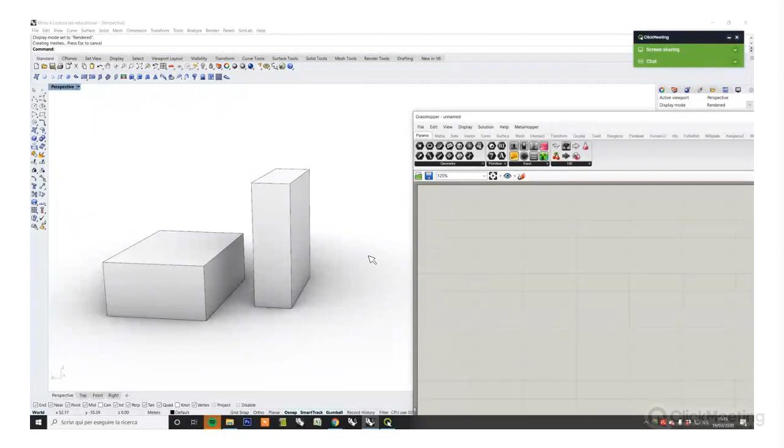So an algorithm is a way for getting a particular task done or solving a particular problem by splitting a complex problem into a set of simple operations and tasks. Before I was talking about a recipe. If you think about baking a cake, for example, we need to use a set of things. We need ingredients, first of all. We also need tools for preparing a cake, an oven, for example, but we need a procedure in order to prepare a tasty chocolate cake. Now, when you are dealing with algorithms, you basically do the same thing.

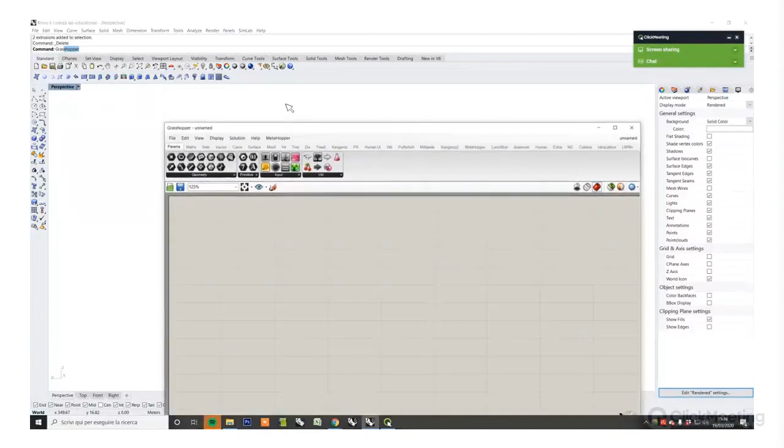And the first thing to understand about Grasshopper is the interface itself, which is a super simple environment. As you can see here, we have this window that works in parallel with Rhino. You can run Grasshopper just by typing the word Grasshopper on the command line of Rhino 6, or alternatively, you can click the relative icon here, Launch Grasshopper. When you launch Grasshopper, you will see this simple window, which is divided into two main parts: this area, called the components area, and this one, called the canvas.

The components area can be imagined like a shelf with ingredients, once again. If you want to prepare a chocolate cake, you need chocolate, milk, sugar, and so on. Our ingredients are stored within those tabs, usually called categories. For example, we have params, mathematical ingredients, vector ingredients, curve, surfaces, and so on. They are not actually buttons. Cosmetically they are similar to the ones in Rhino, but if I click here or there, nothing happens. They don't execute any command.

But basically, you can drag and drop those objects onto the canvas, which is a kind of kitchen table where we are going to prepare our chocolate cakes, our recipes. They are funny and fancy objects. As you can see, you can drag and drop them there. They are different from each other, objects with fancy icons. They look like batteries or boxes. Now we are going to understand what they are and how they actually work.

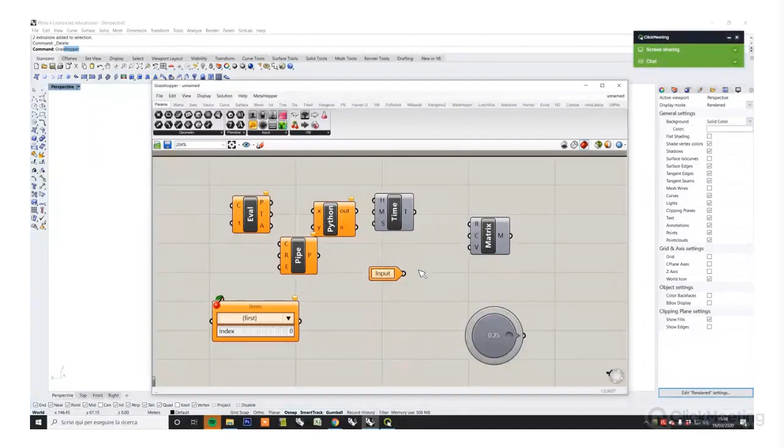The canvas, the central area I showed you before, is not an interactive one. It's not a three-dimensional space. This is just a white table where we are going to create our algorithms. An algorithm, once again, is a procedure and is made using the so-called components. In my analogy, they are the ingredients to create our recipes. Now, let's take a look at the components and how to combine them to create proper, working algorithms.

Let's go, for example, to the vector tab here. As you can see, every tab has a set of subcategories. In vector, you can see field, grid, plane, point, and so on. Let's go to point, click on this one called construct point, and put this object here. I'm also going to use a tip so you can see the name here. This component is called construct point. This is one of the many components you can find in Grasshopper, and every component in Grasshopper does something, generates something.

For example, this specific component, if you hover the mouse here, you can see a tooltip which says this component constructs a point from X, Y, and Z coordinates. In other words, in Rhino, in a three-dimensional software, you can create a point by selecting the proper command and by clicking on the three-dimensional space. Or, for example, we can use this guy here in Grasshopper.

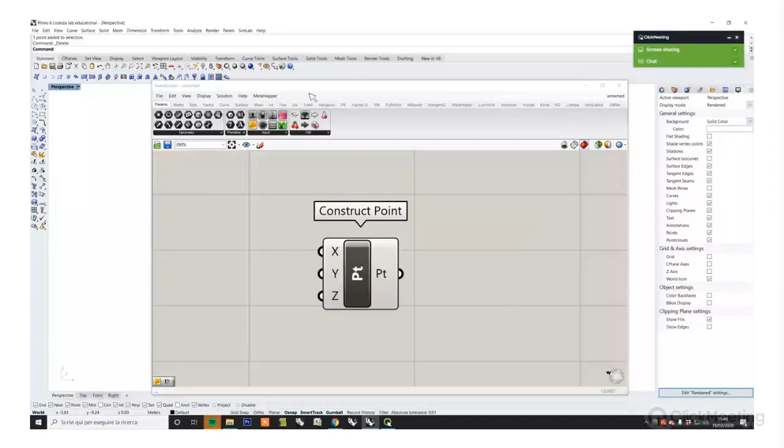In other words, it's important to say that inside Grasshopper, we are going to create the algorithm, which gives us as an output a geometry inside Rhino. So as you can see here, where I can also activate the grid in Rhino, when I put this component within the canvas, you can see this point appearing inside the three-dimensional space, and in particular at the axis origin. So it basically means that this point has 0, 0, 0 coordinates.

So once again, if I delete this component and I put it again, so I come back to vector, construct point here, as you can see, we can see a point appearing in the axis origin. Now, we need to understand how components work, then we need to understand the anatomy of a component in order to master their functioning. So basically, we have three typologies of components. Let me write something here so it will be easier to understand.

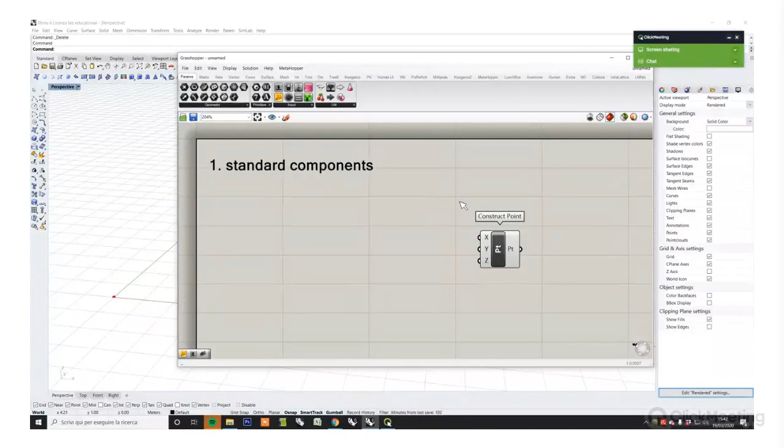So we have the standard components. This is the first typology. And construct point, for example, belongs to this category. Now, a standard component is an object which is fed by data, so we can put data inside this component. It does something and it generates an output. So you can basically imagine a standard component like a kind of blender.

So we have a blender. It means that you can put ingredients inside the blender. The blender does something, so basically it merges the ingredients, and so we get something which is our output. So we can prepare a milkshake, putting, I don't know, milk, ice cream inside a blender. So we blend the ingredients and we get some output. So the standard components, they work like this.

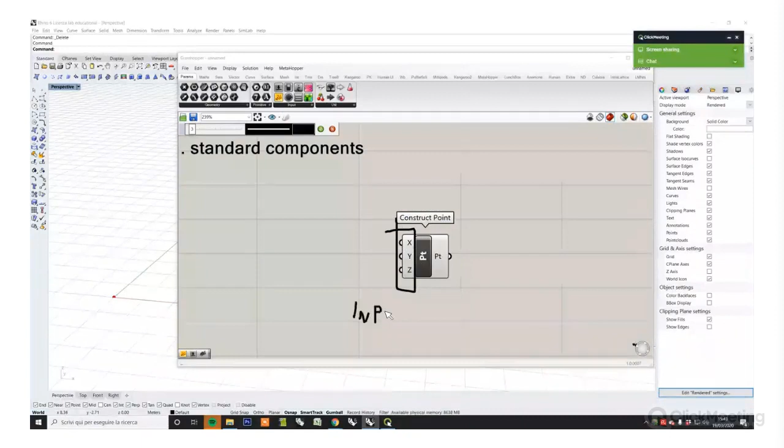So why is construct point like a blender? Because we can put ingredients inside X, Y, and Z. In this specific case, we can put values like 0, 0, and 0 by default. And so we get an output in Rhino, in particular, we see a point here. Of course, it's possible to change the input or also the output. So basically, we have this area, which is called input area, and then we have this area, which is called output area.

There are many ways for changing data, in other words, to change the ingredients within our blender. One of them, in case they are numeric values, is just using a second typology of components. They are called input components. So once again, the first ones are our blenders. The second category, input components, can be imagined as a remote control. In other words, it's a kind of component which doesn't blend data, but just gives data as an output.

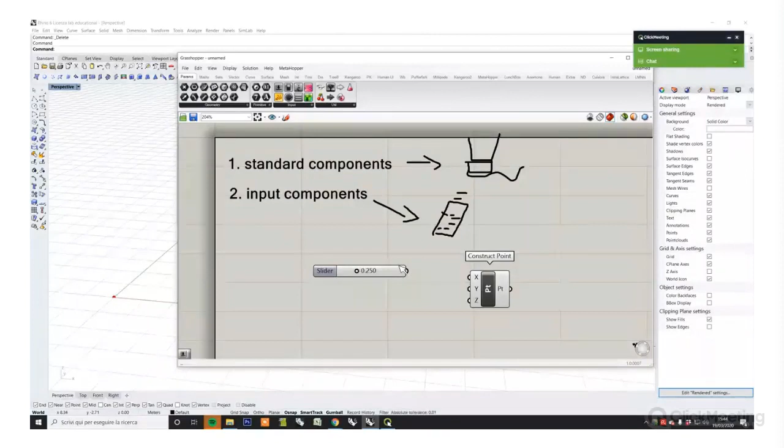One of the most important, you can find it inside the params category and input category, is the number slider. So the number slider, in our analogy, is like a remote control, and helps us in providing numeric values from this component to another input. So for example, I can transfer this value that you can see here. By default, you can see 0.25. I can transfer this value inside this input.

How? We can do it in a super simple way by extracting this object, which is called wire. So this wire can be connected, for example, here. So now we have a direct connection between 0.25 and the X input. So what is going to happen here in Rhino? As you can see, let me come back here.

If I change this numeric value, I can slide this central grip. That's why this component is called number slider, because you can slide this value. As you can see now, the value ranges between 0 and 1. And so also the point is moving from 0 to 1 meters, because right now in Rhino, as you can see here, we are having meters as the main unit. So Grasshopper is not something external from Rhino. We are working inside Rhino in a way.

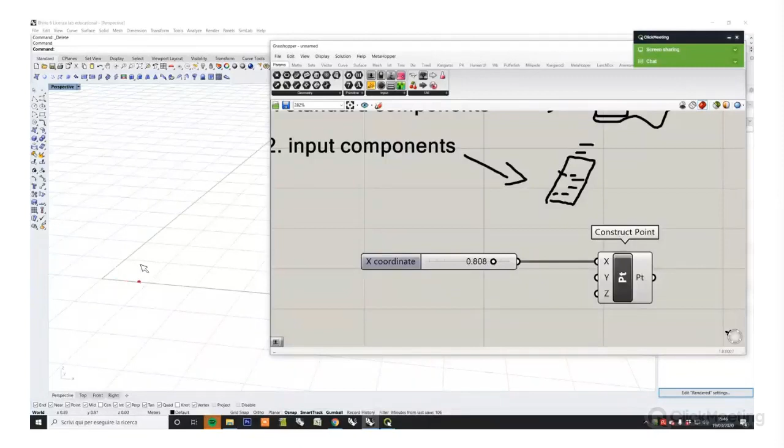And so 1 means 1 drawing unit in Rhino right now. So as you can see, we are getting this kind of parametric behavior. In other words, we are changing this parameter, and this point changes accordingly. We can do the same thing for y and z. We can do it by putting another number slider, and we can connect this one here, for example.

By default, as you are realizing, the slider ranges between 0 and 1. Of course, we can set this object, so we can change the numeric range by double-clicking here and by applying some change inside this window. But as I always say, life is too short to waste time in setting parameters like this, and actually the Grasshopper developers invented a new way, a kind of shortcut for putting numbers inside the canvas.

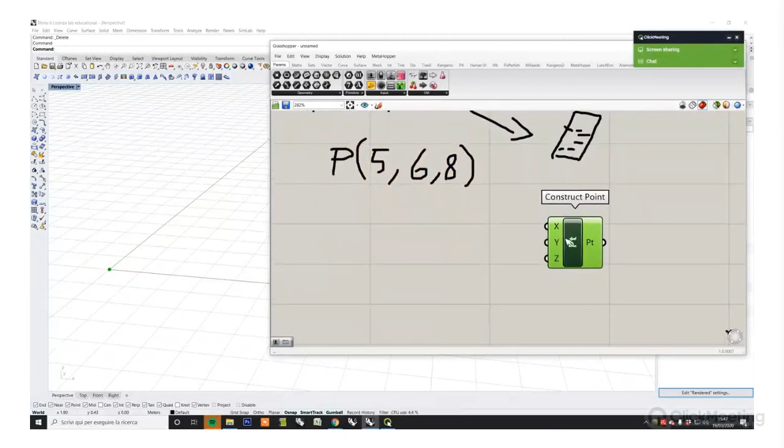So for example, if we want to define a point with coordinates, let's say 5, 6, and 8, okay, we can do something super simple. I can double click on the canvas. As you can see, a search bar appears like that, and I can just type 5, for example. So Grasshopper is suggesting the number slider, so I can click here. And as you can see, we have a slider which already has 5 as a current value, so I can connect this one here.

And as you can see, my point is moving 5 units according to the x-axis. Then I want 6 as a second coordinate, so double click here, 6, and okay. So we have 6 units according to the y-axis, and once again, double click here, 8, number slider, and here it is, we have 8 as a z coordinate. So we have a point defined in space, as you can see here. Of course, we can still manipulate the position by moving the number slider in x, y, and z direction.

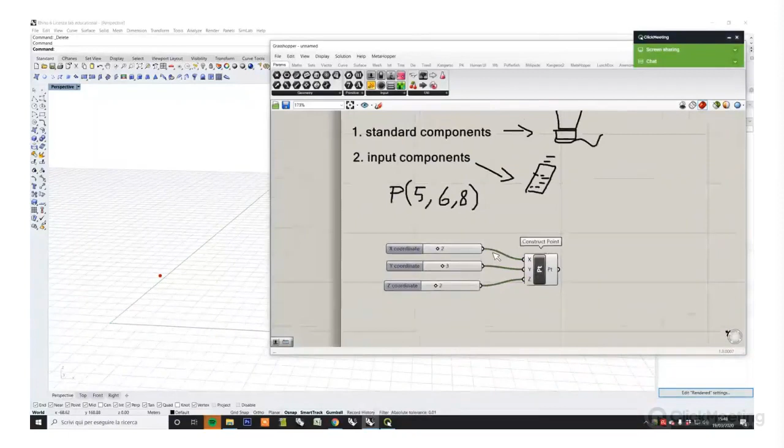Okay. So let me clean up a bit here. So once again, we have construct point, which is a standard component, which can be imagined as a blender. In general, standard components have this kind of layout, this kind of anatomy. We have the input area and output area. In the middle, you can see the component's name. It's also important to say that the 3 sliders are called input components. Why? Because they just provide values to another component. So basically, they cannot manipulate information. They just provide information to another component.

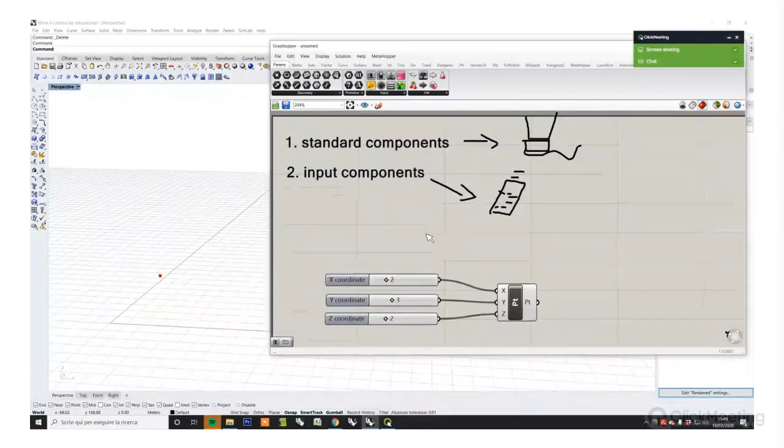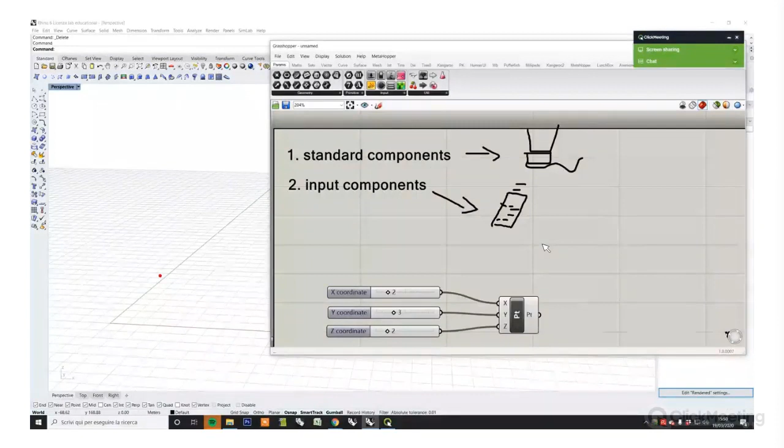So never forget, standard components. I have to say that standard components are the most usual components within Grasshopper. If you click here on any tab, let's say that 80%, even if this is not a real percentage, belong to the standard components typology. The input components are basically stored inside params input, but also when you add plugins to Grasshopper, because Grasshopper allows us to expand its possibilities by adding new features and new plugins, sometimes input components can be spread and put within other tabs here.

Now, the third typology. We are talking about the so-called parameters, but I like to call them container components. Okay, so this is the third category. They are no longer blenders. They are no longer remote controls. They can be imagined like simple boxes. They are like empty boxes where we can put ingredients inside. For example, we can put sugar, we can put milk, but we can put inside them curves or surfaces.

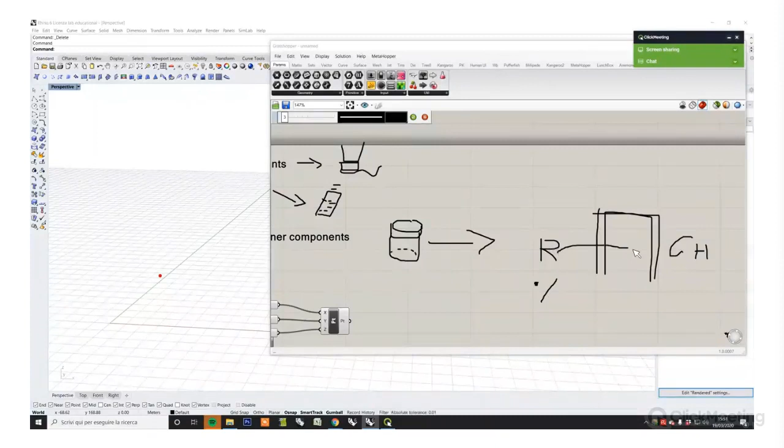And it's important to say that in Grasshopper, they are mainly used in order to create a kind of, I always call it, a Stargate between Rhino and Grasshopper. It means that, for example, if I create a point or a line in Rhino, I can transfer it inside Grasshopper. So a super simple example is I can put a point here. So I'm creating the point manually in Rhino, so we are talking about traditional modeling. Okay, so with the single point command, I put a point here, and I can collect this geometry from Rhino inside Grasshopper.

You can imagine the benefits from that. For example, if you want to create, let's say, a building, a skyscraper, starting from a plan created in AutoCAD or in a 2D environment, you can create the 2D or also 3D elements in Rhino, and you can collect them inside Grasshopper.

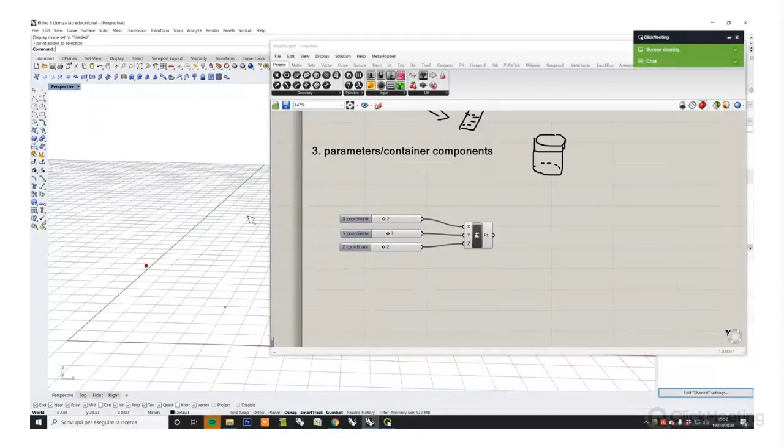Now, in general, you can find container components inside params geometry and params primitive. You can recognize them by the black hexagon icon, as you can see here. So components with the black hexagon icons are container components. And for every kind of geometry, we have a specific one. For example, if you want to collect points, you need to use the point container component here. As you can see, the component is orange, not gray like the first one, because Grasshopper uses colors in order to represent some characteristics about data. For example, if you have a component which is empty, since we don't have data stored inside this component, it appears in orange.

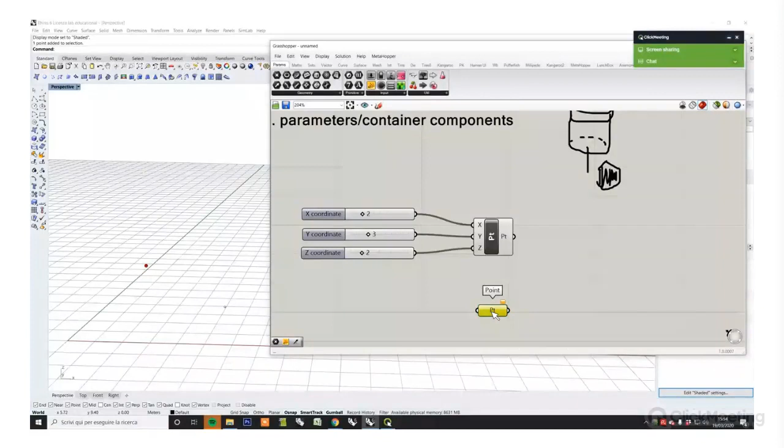A gray component means that it's a component that works properly with data inside. How can we set this point from Rhino to Grasshopper? I can click this one. I can right-click here, set one point. So once again, I right-click this one.

When you right-click a component, also construct point, for example, a context menu appears, and so we have a lot of options. It's not possible right now to explain the whole set of features that we have, but we just have to, in this case, right-click the component. We can ignore everything except this one, which is set one point. So as you can see, the Grasshopper interface closes.

We can select this point, and as you can see, this component now has turned gray. It means that we have the points inside. And so we can manipulate somehow the point collected inside Grasshopper.

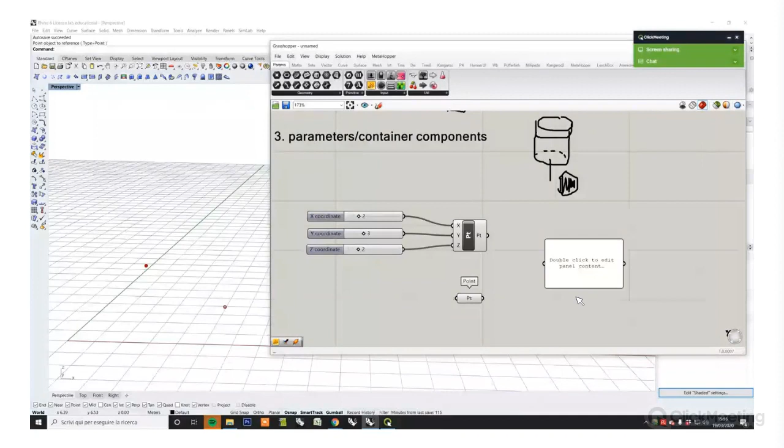It's important to say that there is a tool that you can find in params input. It is called panel, this one here. By default, it is yellow. I just changed the color in my interface. It looks in general like a post-it. This is very useful for reading what is happening inside a component.

For example, if I connect this guy here, it gives us information about the point generated through this component. So you can see 2, 3, 2, which are the coordinates, of course, that we defined through the number sliders. If I'm going to use, once again, this one, like this, as you can see, we can see a reference point. It means that we have a point which is set, referenced from Rhino.

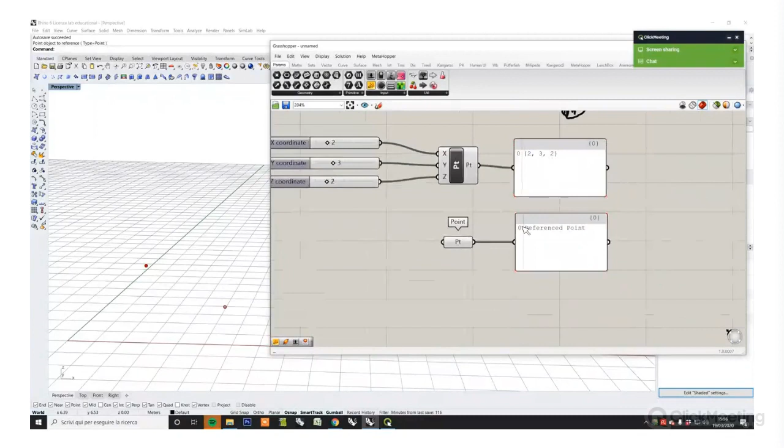The panel is also used for defining numeric values that don't change, and when we don't want to change our numeric value, in general, we use the panel. I want to show you an example. For example, we have here this point with 2, 3, and 2 as coordinates, and they are parametric. They are variable. I can change the first and the second, the x and y coordinates.

If you don't want to change a coordinate, for example, a specific value, we can use the panel. So you can put the panel here. For example, I want 5 as a value. You don't have to confirm using the enter button, just by clicking outside, and so you can connect the panel here. This is very important. Every time you don't want a variable value but a fixed value, you should use the panel as a way for defining the numeric value.

Since, once again, life is too short for doing this kind of process, you can double click the canvas. If you remember, in order to get a slider, you can just write 5 or 6 and so on. Or you can double click here, quotation mark, and then, for example, 5. I click on panel, and so as you can see, we will have a panel with a specific value set here. So, for example, I can connect 5 here. Okay. I can also delete the panel like this.

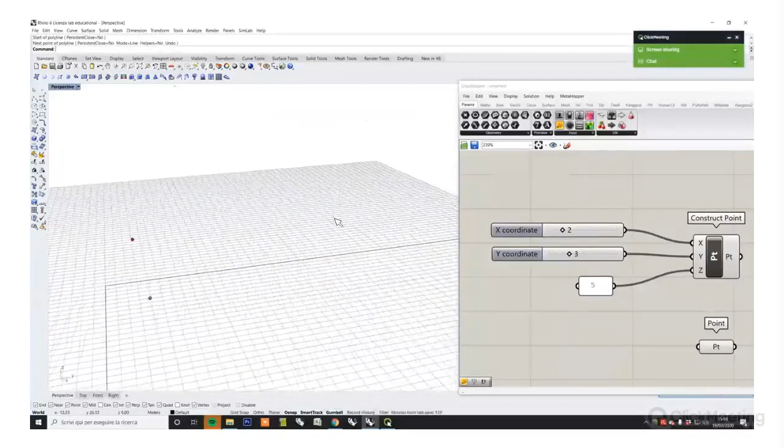Okay, in Grasshopper we can do something similar, but without using our hands, and we need a new component. So we need basically a new blender, a new standard component, allowing us to create a line starting from 2 points. So if you go in curve, primitive, here you can find a component which is called line. It creates a line between 2 points.

Now, as you can imagine, if you are absolute beginners, we can say that there is a component almost for every task. So there are components that basically transfer inside Grasshopper the Rhino commands, but there is also something more. But in general, you can find components for performing every kind of task, more or less. So, line component.

Once again, we don't have time for describing the whole set of ingredients that Grasshopper gives us, but it's important to understand the main logic. So line is a standard component, is a blender. So we put ingredients, we manipulate ingredients, and we get some output. We have A and B, which means point A and point B. The component is orange, which means that we have a lack of data. We don't have data inside. And so I can start by connecting this one here.

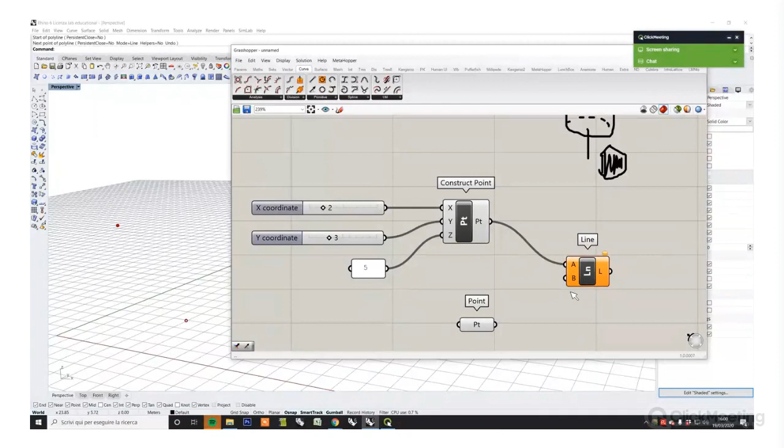Okay, so we define the first point. The component is still orange because we still lack data. We need 2 points in order to create a line. And so now I'm going to connect this one here. Okay, as you can see, we have a line. This is probably the most simple algorithm that you can create in Rhino Grasshopper.

This is a line, but this is a parametric line because we can change, for example, the x and y coordinates. So as you can see, we have a line updating. We can also change manually this point because it was defined in Rhino. So as you can see, we are getting a parametric line.

It's also important to say that if I click on this, nothing happens because the objects generated through Grasshopper are a kind of ghost inside Rhino. We can see them, but we cannot use them as standard Rhino geometry. In order to use them, in order to bake them, this is the proper word, we have to select the specific component that gives as an output a specific object.

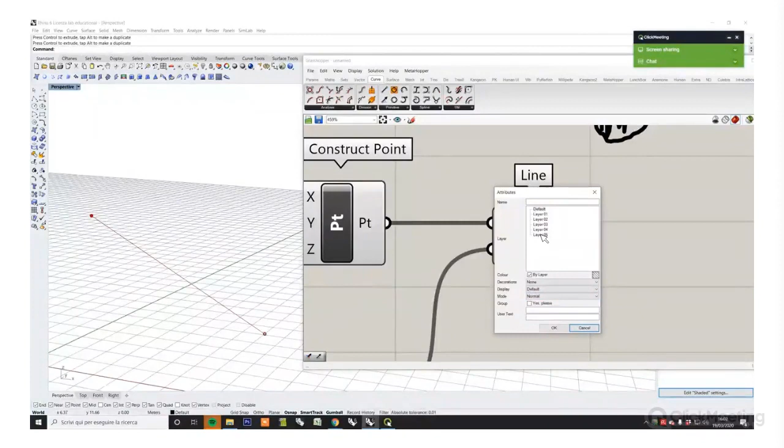For example, if I want to use this line, if I want to touch it in a way, I have to select my component like this, right click. As you can see, we have also here a set of options. It's important to click exactly on the black area, and we can find this option, which is called Bake. If you click on Bake, a context menu appears, allowing us to set a specific target layer, let's say layer number 5.

Okay. Let me go in render mode. Let me change the, okay. So as you can see here, now this line is a Rhino line.

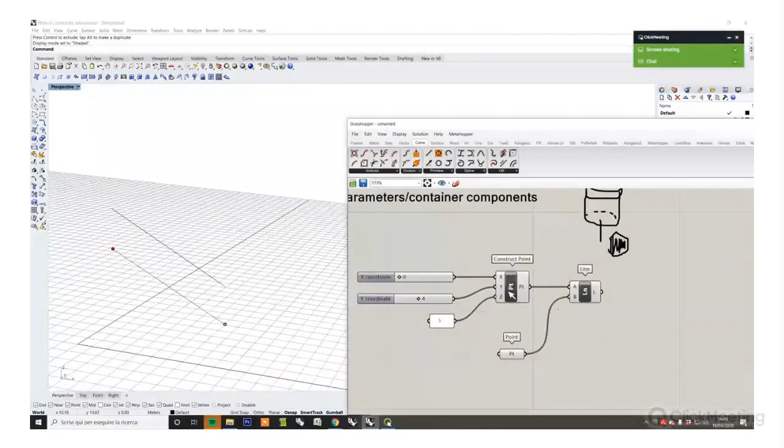So we still have the Grasshopper output here, so we can still manipulate the X and Y coordinates. And for example, we can bake it again. So bake, I go to layer number 5 again. Okay, and you can do as many bakes as you want. It's an endless procedure, and if you have more complex algorithms, you can generate many outputs from the same algorithm.

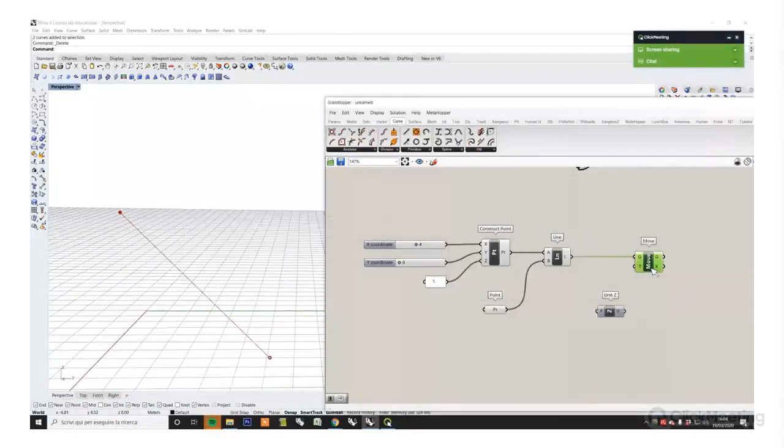Let me change this one. Okay. Another crucial and super important topic is about vectors. For example, I have this line now, and I want to move it according to the X, Y, or Z axis. Now, for example, I'm using the move component. So this is the unit Z component.

With move, I can move an object. This is a component allowing us to move an object G according to a specific direction. T means translation vector, and G means the geometry to move. So the line can be connected here. Okay, so I want to move this line, for example, according to the Z direction.

So once again, I'm double clicking here, move, in order to get the move component, and T in order to define the vector. So let me use unit Z. Just clicking on Z gives us the vector unit Z. I can connect this one here. And as you can see, the line is moving about 1 unit because by default, the Z vector uses 1 as a moving factor.

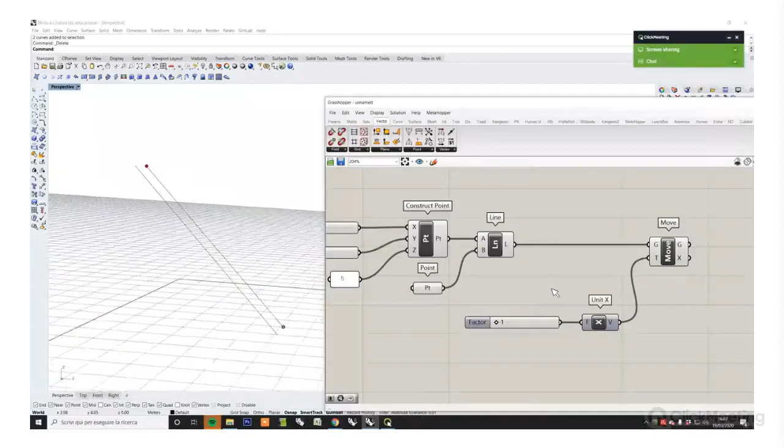If you want to find move and unit x, y, or z: move you can find inside Transform, Euclidean, and unit x you can find inside Vector, Vector. As you can see here, we have the basic unit x, unit y, and unit z. They allow us to perform basic movements and operations.

Okay. This was a super fast and basic introduction to Grasshopper.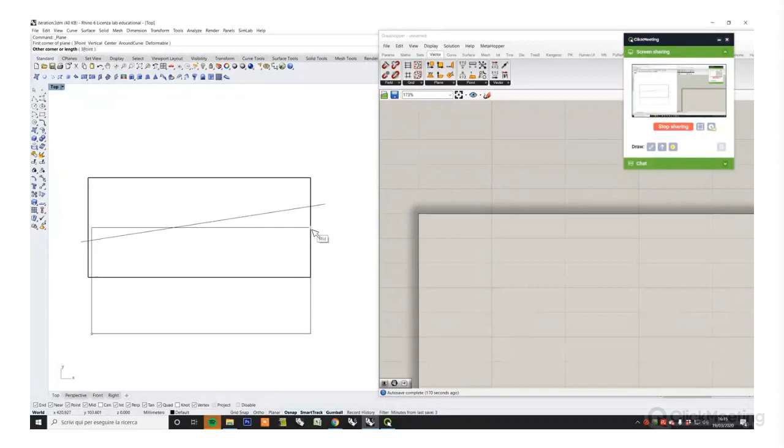And one single line, this one. In Rhino, if you don't have experience, you can right-click here. You can create a rectangular plan, no matter the dimension, and just a single curve, which is a straight line. So nothing complex or difficult to do.

Our final goal is creating this kind of complexity with a particular procedure which uses iteration. So we can create a simple procedure that Grasshopper is going to repeat with a set of iterations in order to get this kind of regulated, controlled complexity. So we have this line here.

As I said before, we can load geometries from Rhino to Grasshopper using this parameter, this container component. You can find it inside Params > Geometry. We have the curve component, this one. So I click on this one, right click, set one curve, and I set this curve here.

We don't have much time to explain, but every time you set a curve or surface from Rhino to Grasshopper, it's important to right-click the component and set this option, called reparameterize. You need to trust me right now about that — if you already have experience you know why. In order to simplify the process, it's basically a way of parameterizing this curve from 0 to 1.

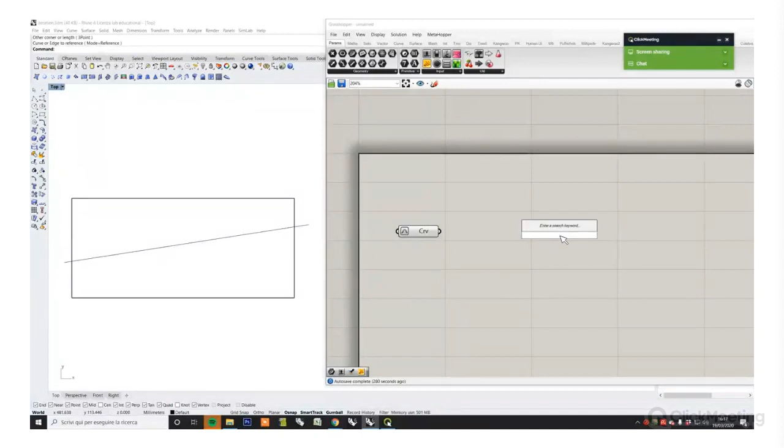For example, if I use a component called Evaluate Curve, I can connect this one here — this is a standard component. It needs a curve, and we can define a parameter which is a value between 0 and 1. For example, let me put 0.5 — double click here, 0.5 — and I connect this one here.

So I can play with this slider from 0 to 1. If you parameterize with the option I showed you before, you can walk along your curve by sliding the slider between 0 and 1. Okay, like this.

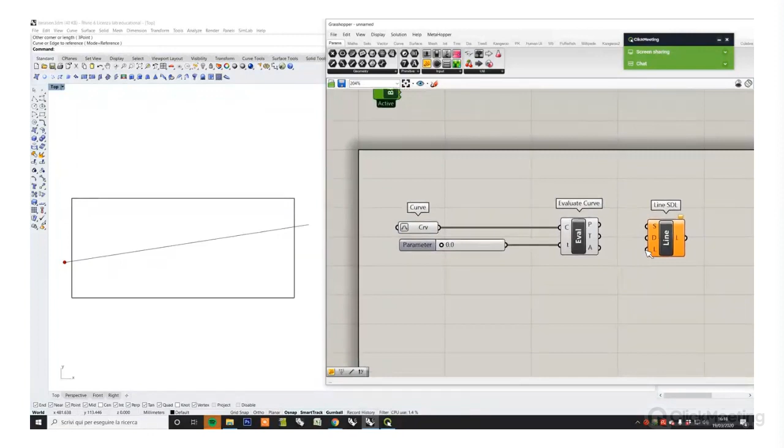Now I'm going to use a new component called Line SDL, a new standard component allowing us to define a line starting from a start point S. So I want to start my line from this point, which gives this output that you can see here. We need to define a direction.

Now I want to create a vertical line starting from this point, something like that. If you remember, we can define the unit Y direction, so this one is connected here. And L is the curve length — let me use an arbitrary value, like 200.

That should be in scale with my drawing. So as you can see, we are creating this line. Of course, you can change the line dimension like this — so let me do 200.

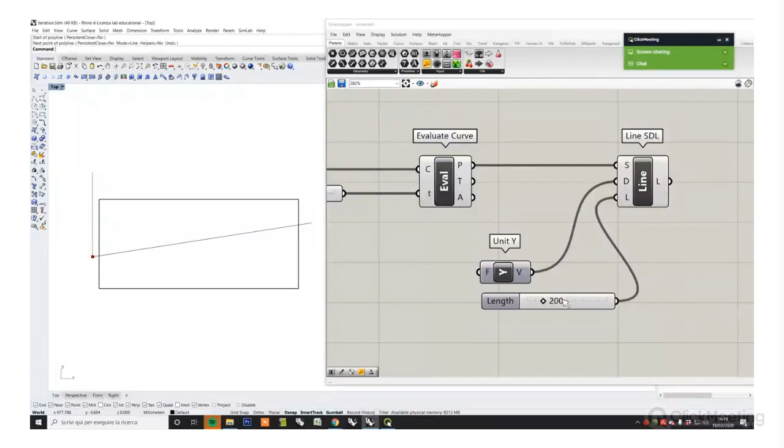If you want to create also the symmetric part according to this point, there are no options if you want to do it directly here, but use another standard component which is called extend curve.

As you can see, if this is the first time that you are using Grasshopper, probably you are overwhelmed by the amount of components that we are using, and you're probably wondering how I can memorize all of that.

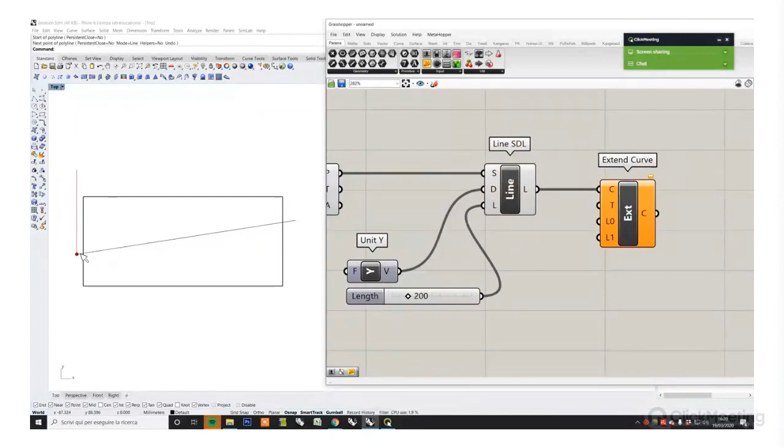But this is absolutely not a problem, and the daily use of Grasshopper will help you in memorizing the possibilities that the components give us. For example, extend curve allows us to extend a curve like this, starting from the L0, which means the start point, or the end point.

So if I'm going to use the same number slider that I have here, so here we have 200, and I'm going to connect this one to L0. As you can see, nothing happened because also the L1 value should be defined. We don't want to extend our line here, so we can just put 0 using the panel. If you remember, if you want to define a numeric value using the panel, you can double click here, quotation mark, 0. Here it is. So we have 0 here, and this one goes here. Okay, so we have a line defined in Rhino.

This one is created in Grasshopper, and as you can see, this is symmetric around the point defined by the evaluate curve component. Of course, if you come back here, you can play with this parameter, and you can walk along the curve.

The second thing that we can do is also playing with the curve orientation. So basically, we can rotate this line around the point here. How? Basically, we can play with the direction that we are here, and we can rotate it.

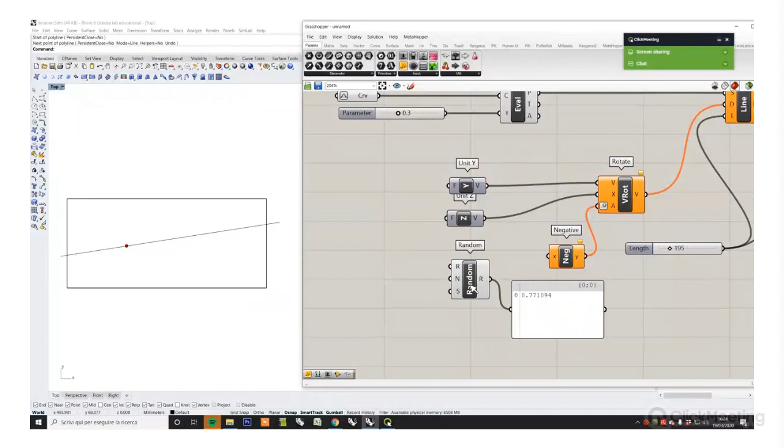So I can do like this. I delete this guy here. There is a component which is called random. Don't be afraid, it's a super simple topic. I can connect a panel here. By default, if I just put the random component on the canvas and I connect a panel, you can see 0.77, because by default random generates a random value which is between 0 and 1.

And it generates just one value because inside this input we have 1. We can change this numeric domain by using a component which is called construct domain. So let's go here in construct domain. No, sorry, not this one. Okay, this one goes here.

And for example, I want a numeric domain between 10, I don't know, 220, for example. Okay, as you can see, the random component picked just one value, because here we have 1 and we won't touch this value here, the n value, so just one value.

And as you can see, we also have a third input, which is called seed. This input allows us by connecting a generic value here to change the random value generated by this component. You can imagine this one like a slot machine. You just play with the button, and so you generate different values. But they are always between 10 and 220.

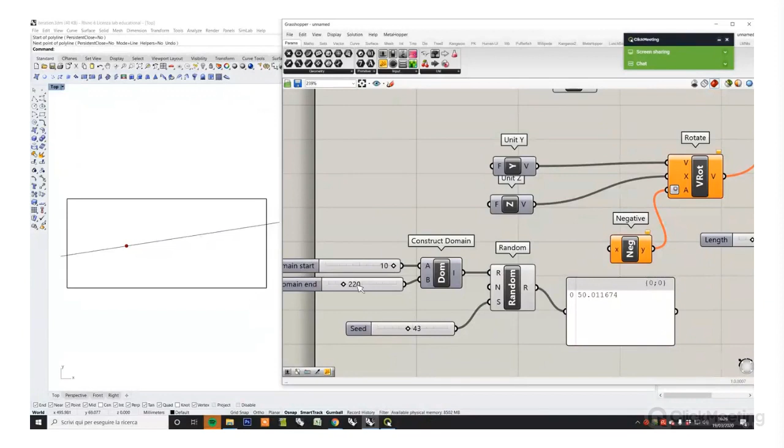So that said, I will connect random to negative. And so we have a specific rotation angle, which is random and is generated by this value here. So once again, we can move this line here like this, and we can also rotate with a random value like that.

Now, we should take some benefit from the computer and from this kind of algorithmic environment. So I want to create an automatic procedure, because we always have in mind this geometry, which is basically like a movement and rotation of different lines. We can create an automatic procedure for creating this kind of effect, starting with this very algorithm.

So let me change this one a bit. I'm just moving it like this. And we basically have two sliders that control the whole thing - one for moving the line and one for creating the rotation.

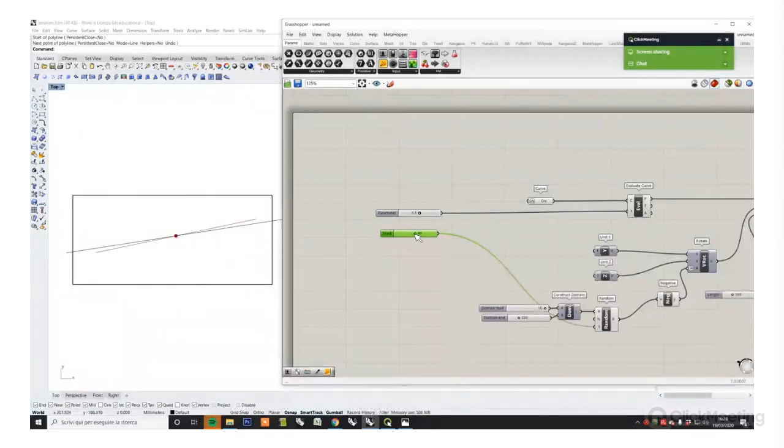Okay, now in Grasshopper, this comes from a plugin called Kangaroo, but I think it's available in other plugin sets too. There is a component called counter. The counter allows us to create a value which changes over time, along with two other components - one called timer, and the second one called Boolean toggle.

Okay, it's super simple, don't be scared about that. Basically, I need to connect the timer here. You have to extract this strange wire, because this one is different from the others we saw before, and you connect this one directly to the counter. As you can see here in Windows, a timer block appears, and we can control this one - we can turn it on and off also by clicking from the Windows bar.

The toggle is a toggle that allows us to switch from true to false, as you can see here. True means that our counter is reset. If I turn this one on, as you can see, we have this counter that works like counting from 1, 2, 3, 4, 5, 6, 7, and the update happens every 1 second.

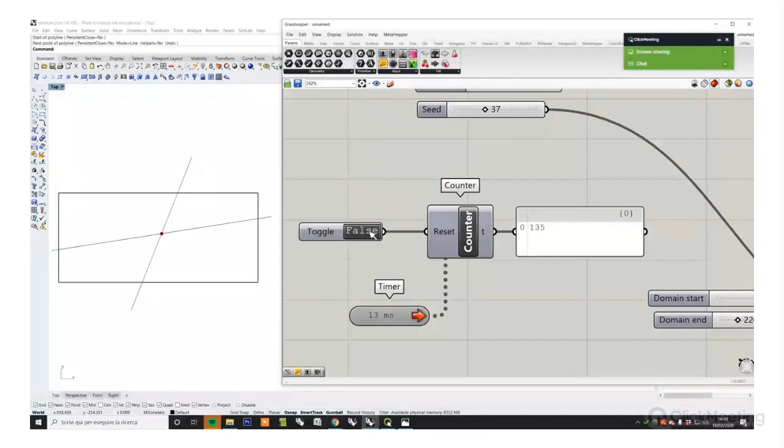Now I want to use this kind of system to control my first slider. So let me delete this one. Of course, if I'm going to connect directly this one to this one, I will get something like this - as you can see here, we have this kind of super fast movement and acceleration.

So we can, for example, divide in Grasshopper. If you double click the canvas and click on the division button on your keyboard, you can select the division - you can also find it in math operator. I'm going to divide the value coming from the counter, let me divide it like by 33, for example. And this one is connected once again here. I get rid of this one.

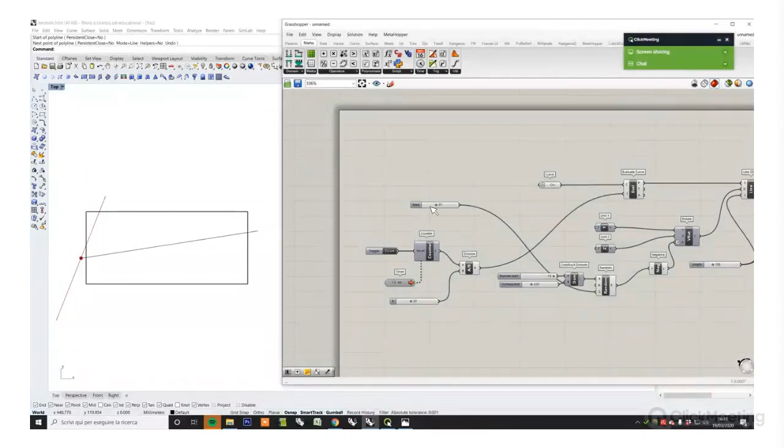Let me try to be super organized. So basically I'm using a timer in order to inform this numeric value, and so to move this geometry here. As you can see, it also goes over my line, but this is not a problem. So this is the first movement that we are automatizing in a way.

Another thing that I want to do is, with this same counter, change the random seed in order to generate random rotation values when I trigger my counter. So with just one counter, I can filter by the division to do this kind of movement, and also a random rotation thanks to this guy.

Okay, now this is funny, nice, but I don't see anything - I don't see this effect, I cannot see this kind of effect right now. Why? Because we basically need to record the output coming from this movement in a way. We need to record every single position. So Grasshopper allows us to have this kind of...

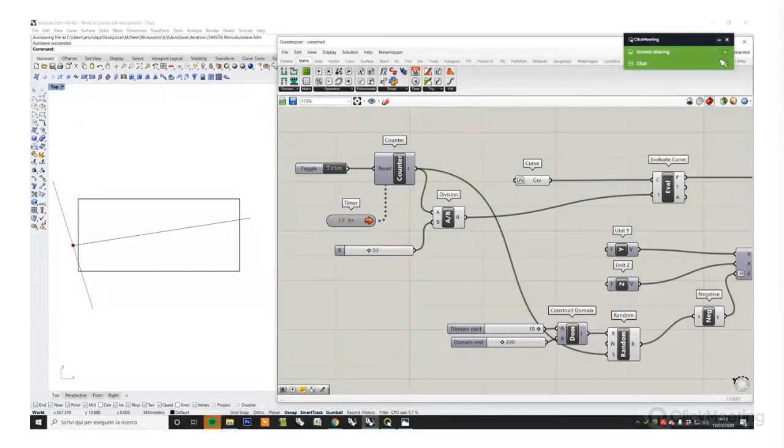Let me use, for example, the record component, which is called data recorder. And so I'm going to connect this one here. Okay, let me start this one again. Now, as you can see, we are actually recording all the movements this way.

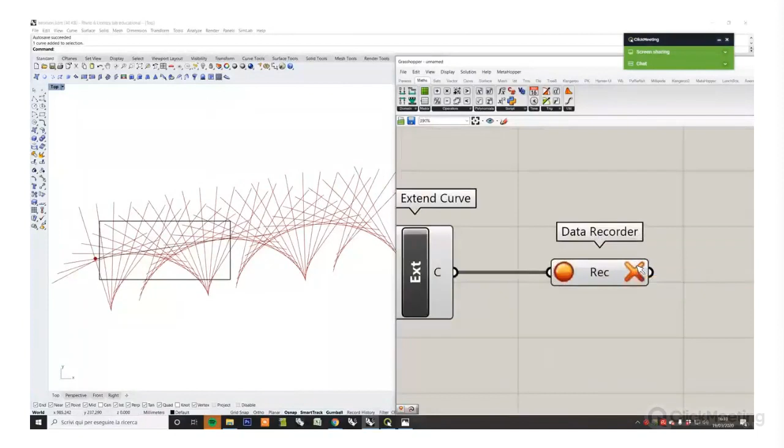If I double click here, as you can see, the lines generated are still there. So you can go back to the data recorder and click on X if you don't want to see them anymore. We can also move the data recorder here, so we have all the controls in the same environment. Okay, so once again, I can click on this one.

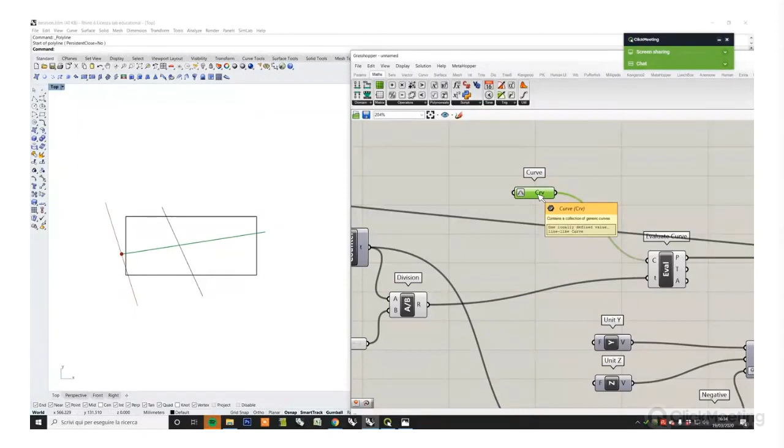Something very interesting is that I used one line here, but we can also use a second line, for example, that I can create using the polyline feature in Rhino. So where we collected the first curve, we can actually collect two curves - right-click, set multiple curves, and I'm going to select both.

Okay, so here we have, once again, right-click, set multiple curves, and I selected this one and this one. Now I'm double-clicking on this, once again, on the trigger, and you can see this effect. Okay, X in order to delete everything.

And so double-click here. I will show you the whole algorithm, this is a kind of overview. Okay. So let's do something like this. Okay, they are running. And then I double-click once again on my toggle in order to stop the movement and the curve generation.

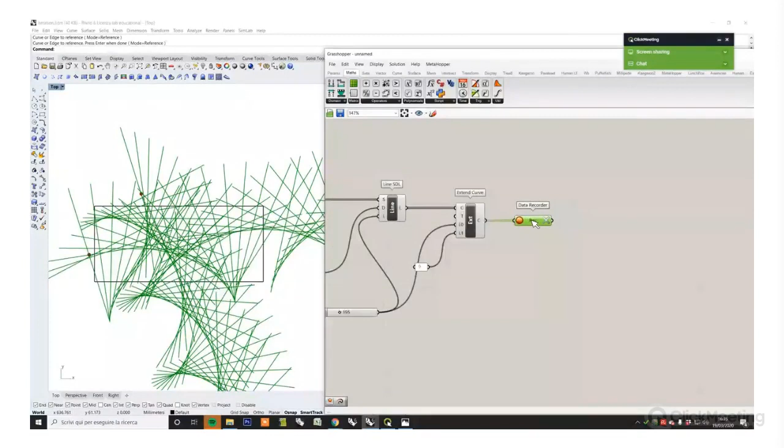Now we can do something interesting. For example, let me move this one here. Okay. Something that we can do is use once again the extend component that you saw here, extend curve. We can connect this one like this. And let's use, I don't know, 355, something.

So I want to extend the whole set of curves in L0 and L1 direction. Boom, like this. So we are getting something which apparently looks like a mess. Now, in Grasshopper, if you just started today, it's important, as you can see here, we have 1 point and still 1 point because it comes from the first output that we had here, and we see the output from line, from extend curve, and so on.

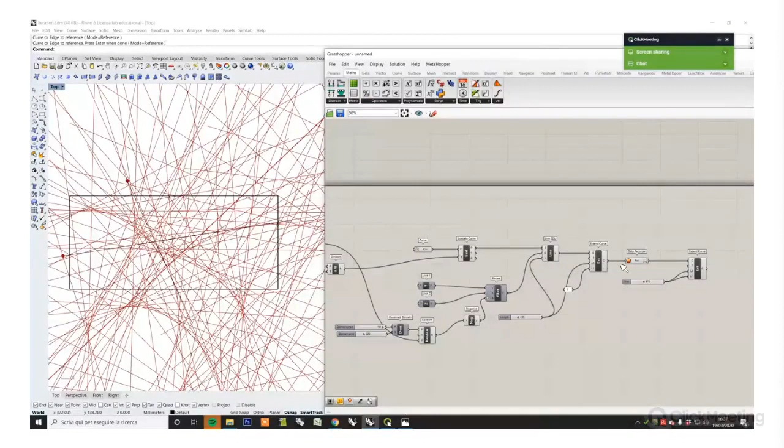Now we just want to see the output of this component. So we can zoom out. I can select everything, right click, and I select preview off. So like this, I'm sure that I'm working only on the output of this component here, extend curve. So if I click on this one, preview off, as you can see, we don't have any kind of output on the Rhino interface. Select this one, right click, preview on. Okay.

Something that we can do right now, we can also extend a bit like this. Okay. If you go in intersect region, you can find a component which is called trim with region. And I want to trim those curves using a trimming region which is defined by the surface frame here. So curve component, right click, set one curve, and I have my frame here. This one goes to region.

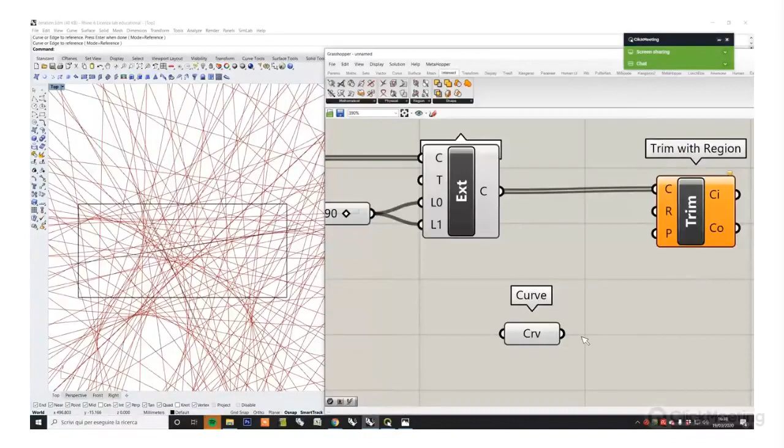And apparently nothing happens. But if you turn off the preview of this one, you also turn off the preview of this guy here, and you apply another curve component. Okay, as you can see from here, we are selecting all the curves outside the surface, and with this one, we are selecting all the curves which are inside the surface. And you can still play with the other.

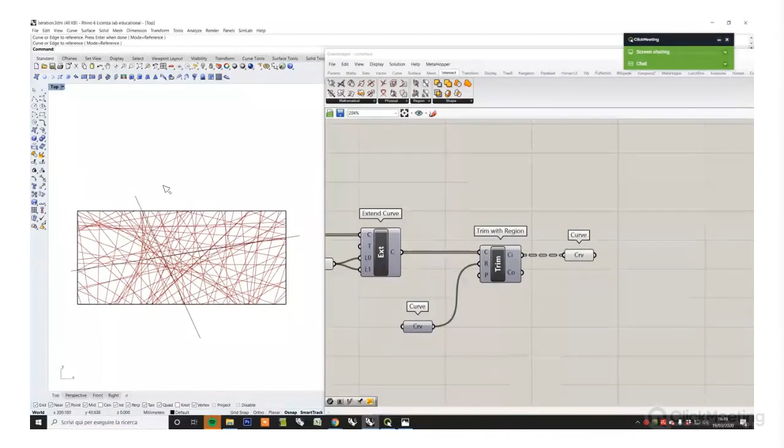So, for example, something very simple that you can do at this point is use a component which is called surface split. We can select the surface from Rhino. You can see here. I'm connecting the surface here and this one here. Now, it's difficult to synthesize this topic, but there is an option that we have to use, which is called flatten. You have to select this geometry, right click, and you click on flatten. Okay. I'm turning off the preview on this one. And now we basically split the surface into a set of pieces using this set of curves all together.

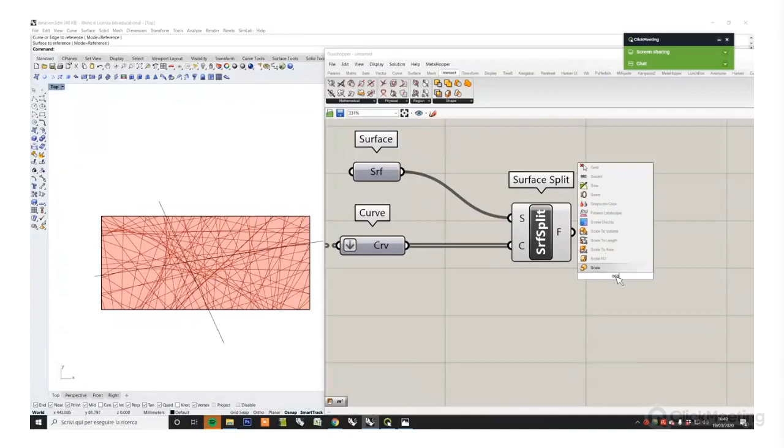Just for displaying the output, you can scale those geometries. So I'm scaling with the scale component, calculating the center of each piece using a component called area, and this one. As you can see, area is finding the center of each individual piece. This one goes here. I'm selecting those, right click, preview off. And then, for example, 0.8 as a scaling factor. F defines the scaling factor of our geometry.

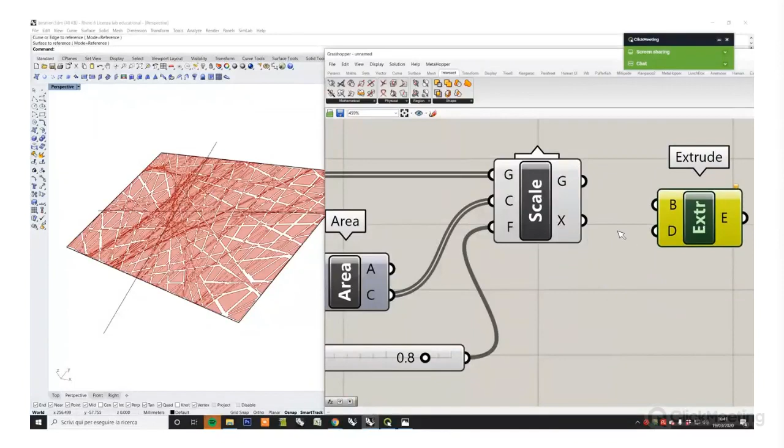Once you have this, we can, for example, go in a perspective mode. And we can extrude, the extrusion logic that you have in every modeling software. So I want to extrude those curves according to the Z direction. About, let's say, 6 units. It's a bit heavy. Okay, and then we have this result.

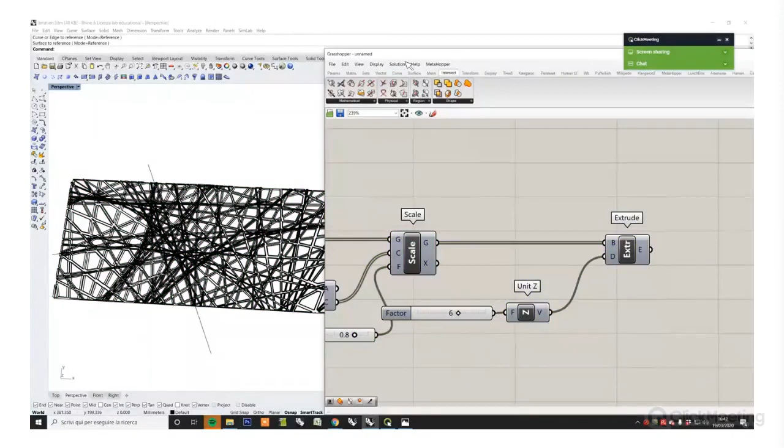Now, if you want to see, this is still a ghost, it's a preview from Grasshopper. If you want to bake it, you have to right-click this one, bake, default. Okay, let me turn off the preview of everything right now, and I go in Rhino. Now this is a set of Rhino geometries. Let me go, by right-clicking here, in Arctic mode, and we got this kind of complexity. And it's interesting because we just started from one line and one point moving along this line.

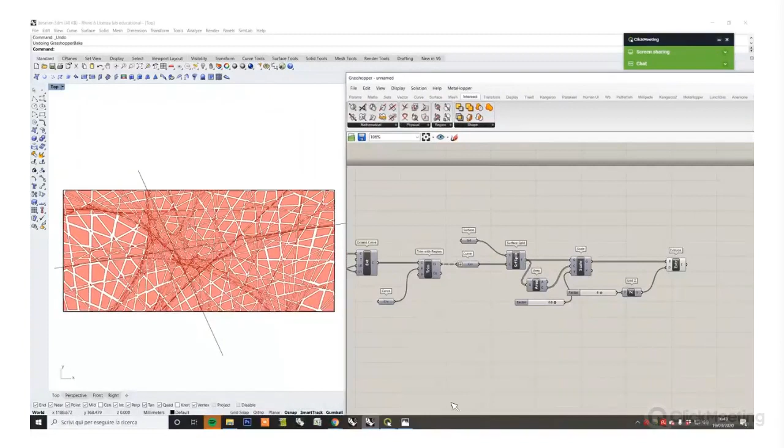Okay, so if you want to get exactly this kind of output, we need to change the final part of the algorithm, and there is something, let's say, more complex to do, but nothing that, speaking to beginners, you cannot understand. We just have to change the final part of the algorithm.

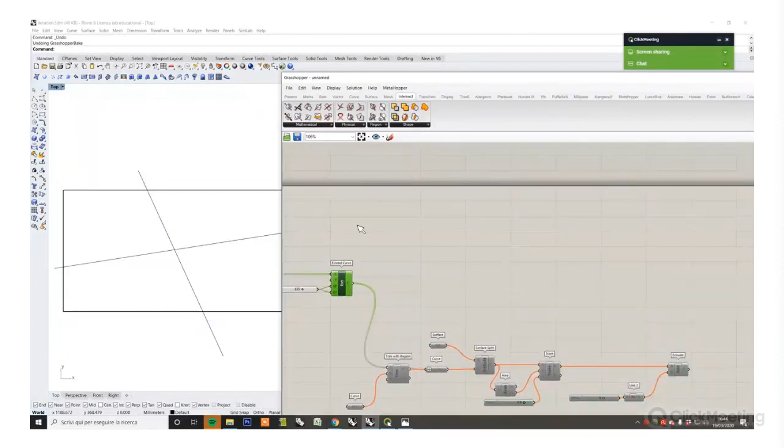So I can freeze this part. You can select everything, right click. You can disable this set of components. So they stay there, but they are not working. They are sleeping. And then we can start from this component here and this set of curves. Let me just change it a bit.

Okay. And I'm going to use a component which is called offset curve. If I focus actually on one line, as you can see, if I use offset, it's offsetting in one direction. I can use 1 as an offset distance. Okay. And then I'm going to do another offset with a negative value here. Okay, like this.

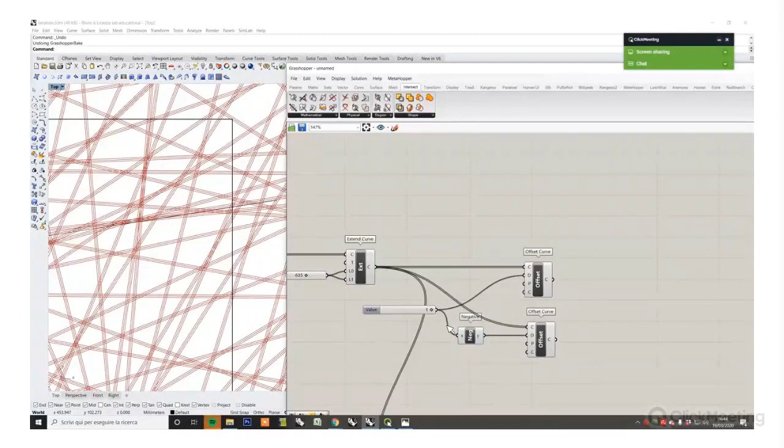Okay, so basically now I'm going to turn off this one. We have an offset in both directions, and we can control it with this slider. Okay. Now we started with one line, then I did the first offset, then the second one. And now I want to create a surface between the offset curves. We can do it with a command which is called loft.

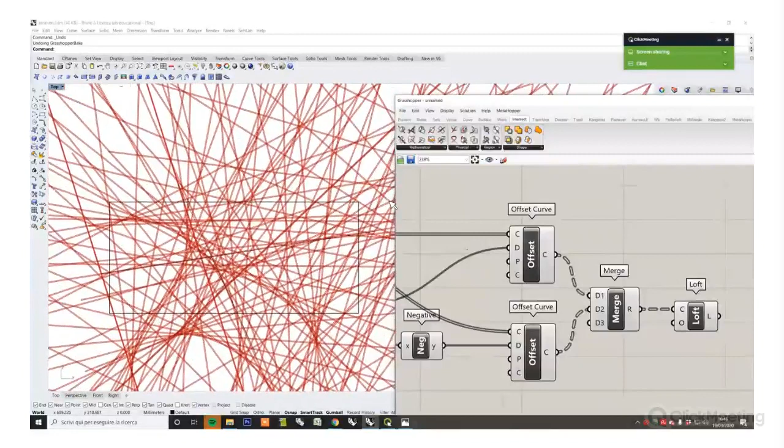But we need to gather them together with a component which is called merge. This one goes here, this one goes here, and I can connect this one here. As you can see, this is very powerful because since the procedure works, it works for the whole set of lines, all the couples that we have here. Okay. Now the loft is a set of surfaces. Okay, I can simplify a surface like this.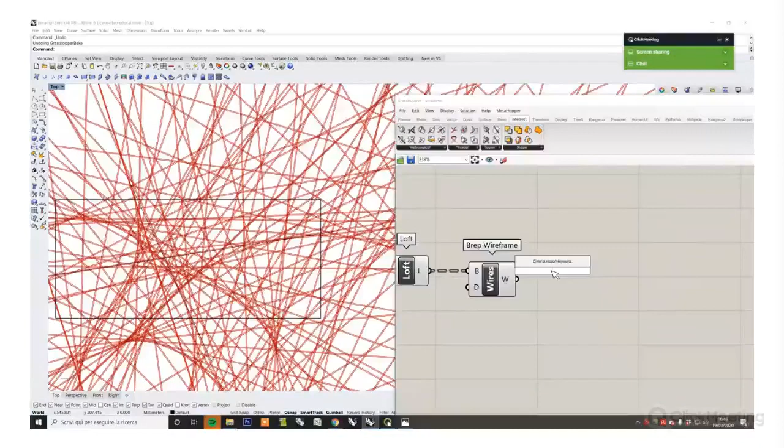Now, as a second step, I want to extract the wireframe, which consists of 4 lines, which is the surface frame in a way. There is a component which is called wireframe. Okay, so wireframe, if you have a surface, gives you 1, 2, 3, 4 lines, and we want to join them together. The proper component is called join curves.

Now you cannot see actually the benefits from this procedure, but basically now from a set of surfaces, we got a set of closed polylines that are our surface frames, basically. Then I need to flatten here. You have to trust me. It's not possible in a few seconds to explain why I have to do this, but it's an operation that we have to do at this point in order to have the individual polyline frames so they work individually.

And finally, I can use a component which is called region union. You can find it in intersect, shape, region union. And this one does the magic in a way. Let me connect this one here. It takes some time because it's a super complex procedure. Maybe we have to simplify the starting input, because now basically this component is performing the union of all those regions.

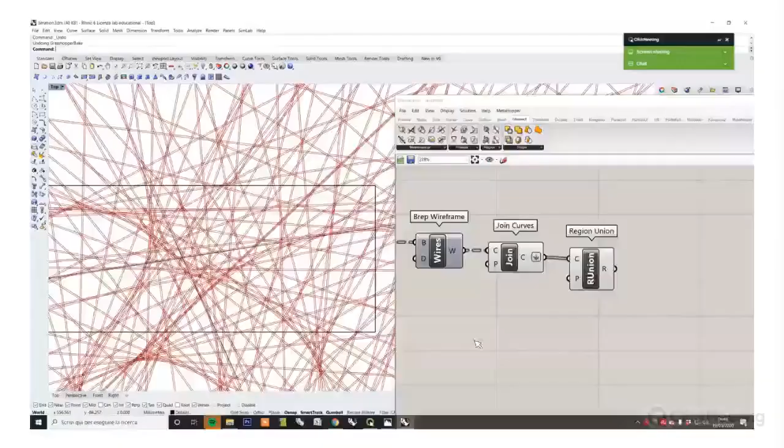Okay. As you can see, if I turn off the preview of join curves, this component really did the magic, because they are now one single piece. The regions are actually blended together.

Now, another possibility is to create one single surface, which is a trim surface, inside this complexity. Okay. Use a component which is called boundary surface. It will also take some time now. So basically, this component boundary surface creates a flat surface if you have a closed and planar set of lines.

The procedure is a bit slow also because my computer at this moment is also performing the YouTube streaming and the ClickMeeting streaming, so it will take some time, but it's a straightforward procedure. Okay, we are almost there.

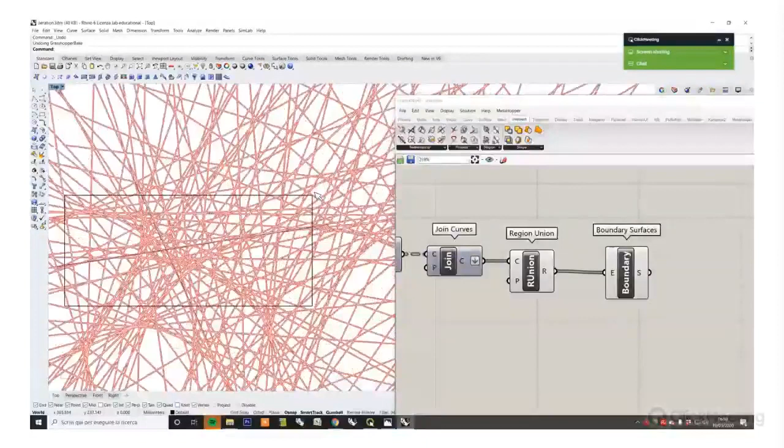Okay, so as you can see, we have a single surface right now. And of course, we need to get rid of the part which is outside our geometry here. So in order to do that, with our curve component, we can set once again this curve here, which is our frame, and we can create a pipe around it.

Pipe is like, if you have a curve, it creates a kind of cylinder around it, and you can also close the relative ends. So you can right-click here, and you can click on flat. We are basically creating a pipe in order to create a cutting frame and get rid of all the pieces of surface which are outside this frame.

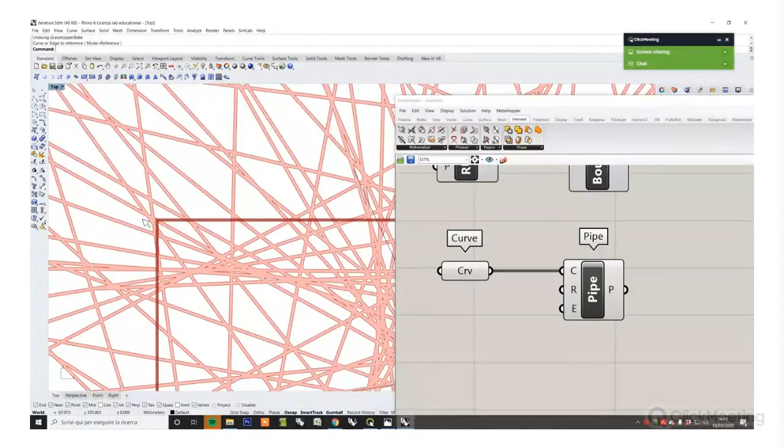Okay, so there is a component here which is called trim solid. We want to trim the surface using the pipe as a trimming geometry. Once again, it will take some time. Okay. Now I'm going to turn off the preview of this one.

And if I connect a panel here, as you can see, we are getting two surfaces, the one outside and the one inside. In Grasshopper, if you have a set of items, item 0, item 1, and you want to select one of them, we basically want to select this one. There is a proper component, which is called list item. We need to select number 1, so I put 1 here. I turn off the preview of this one, and I'm getting this guy here.

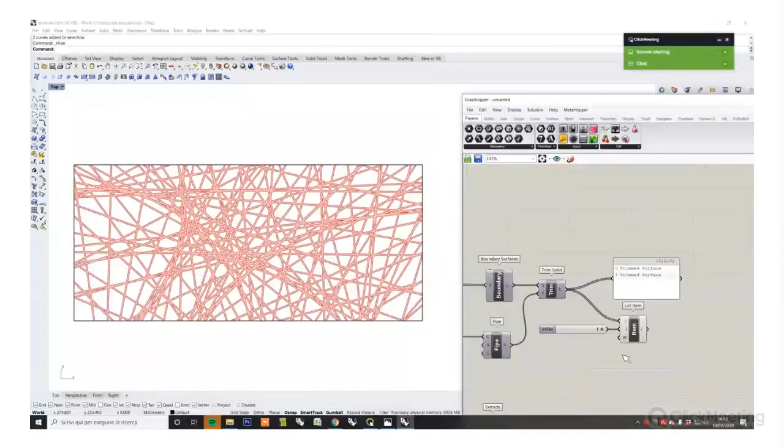Let me turn off the preview. Let's go to perspective. I can extrude. Direction Z. Okay. Let me change the extruding factor. Okay, and finally, we can bake this. Okay.

And as you can see, we are getting something which is absolutely similar, with the same generation logic of the thing that you saw in the picture. I can also turn off the preview of this one.

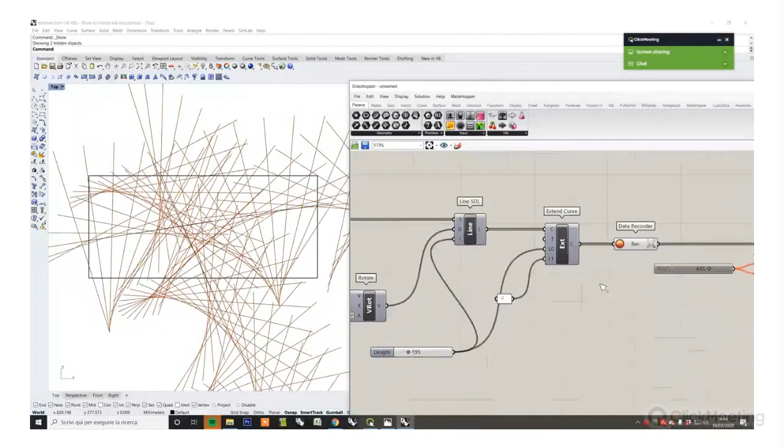This procedure is not, let's say, static, but you can create many different geometries. So let me come back, for example, here. Now I'm disabling the second part of the algorithm, turning on again the data recording. I'm clicking on the X, and for example, we can add different lines. So I'm going here, set multiple curves. Just 1 second. So I'm selecting many curves like this. Okay. Maybe we can activate the second part of the algorithm in order to see the output of this one.

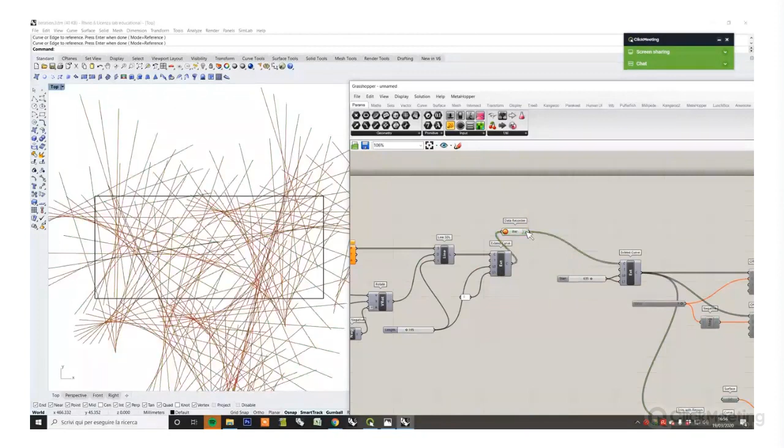Or we can do something completely different, like changing the typology of curves. For example, we can start with 2 circles. So set multiple curves. And this procedure will give us something completely different. Now I'm just stopping. So you can create a super complex network with some logic behind, or let me change again. So every time you change something, you have to click on the X in order to delete it.

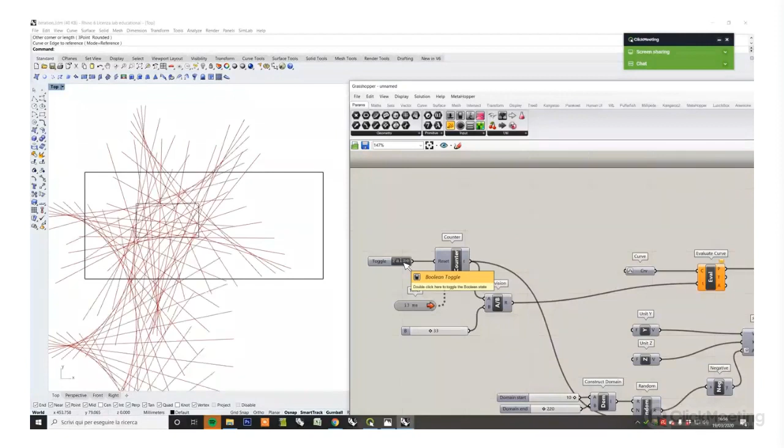Or I can create a rectangle inside. Set one curve like this. So as you can see, we can apply and use this kind of procedure in different ways in order to get different output.

So, well, that's it. I think that you enjoyed this second part, which is kind of, let's say, an intermediate lesson in terms of level or complexity.